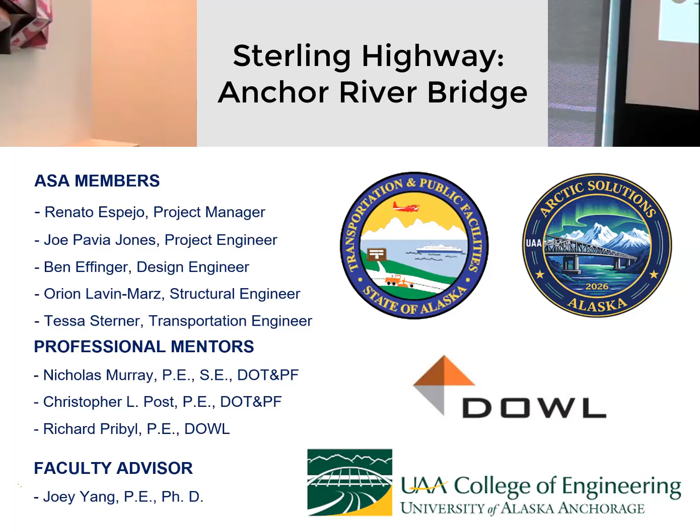Today, we'll talk about our project background, our design criteria, also we'll walk you through our decision matrix, how we completed all those projects, and our alternative analysis between roadways and bridge, and also our cost estimate, and we'll end with our lessons learned. We'll begin with our project location with Joe.

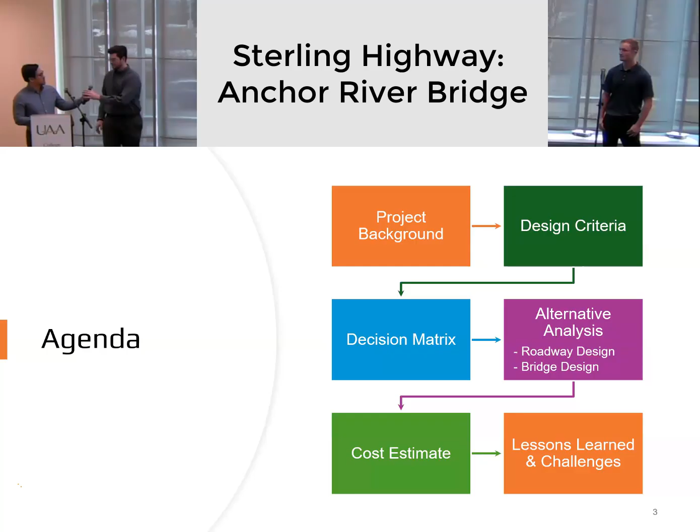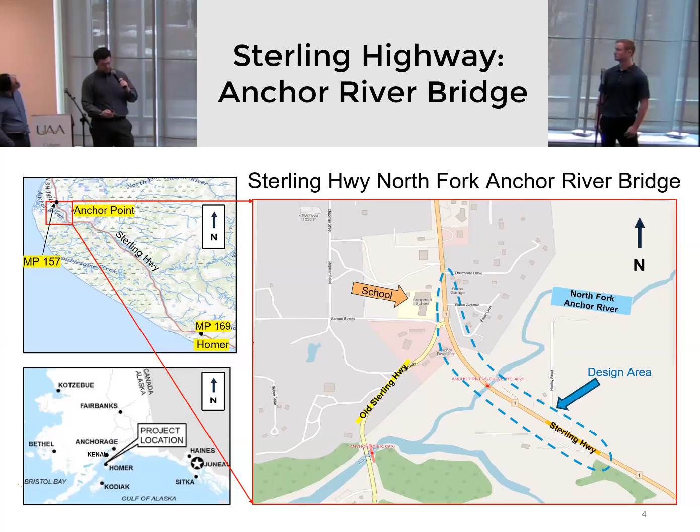Okay. So located in Anchor Point, just north of Homer, Alaska, near the intersection of the Sterling Highway and the Old Sterling Highway, we'll be focusing mostly on the area where the Sterling Highway crosses the North Fork Anchor River, where there's a bunch of old culverts. So in the 1960s, they put these culverts in thinking it'll work really well. They buried them under 50 feet of dirt, and it was super simple, worked really well.

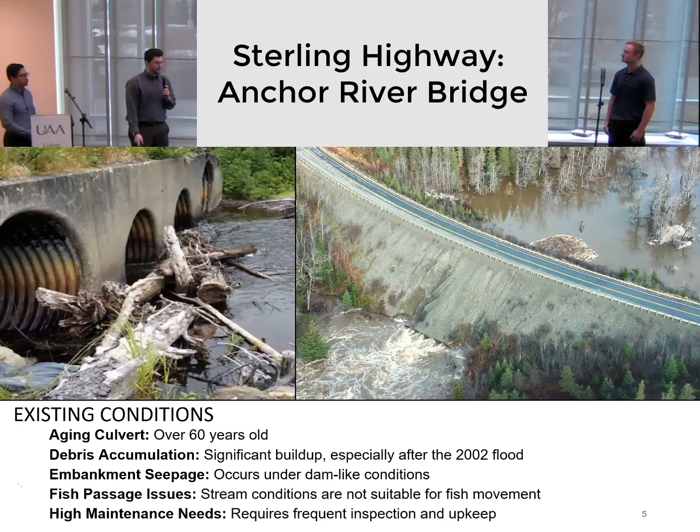Issues are that it requires regular maintenance to clean up all the debris, because otherwise this gets backed up, which you can see over here. And if they don't always do that, there are instances like in 2002, where we had a really extreme case with major rainfall and it all got clogged up, and it caused the road to act more like a dam, which is not what it was designed for, and it nearly washed out the road. Which is what we don't want.

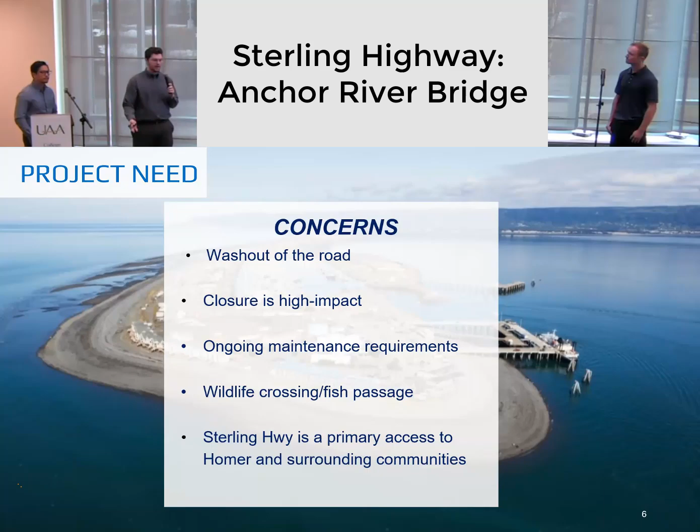Because this road is the main access between Anchorage and Homer, and it's also the main access to the local community, if this road were ever to wash out or close, it'll have a huge impact on the local area, and we don't want that.

So right now, the current speed limit of this section on the Sterling Highway goes from 55 miles per hour transitioning to 45 at the crossing. With our study, the 85th percentile speed ranges between 52 to 57 miles per hour, so we are designing our speed to 55 miles per hour.

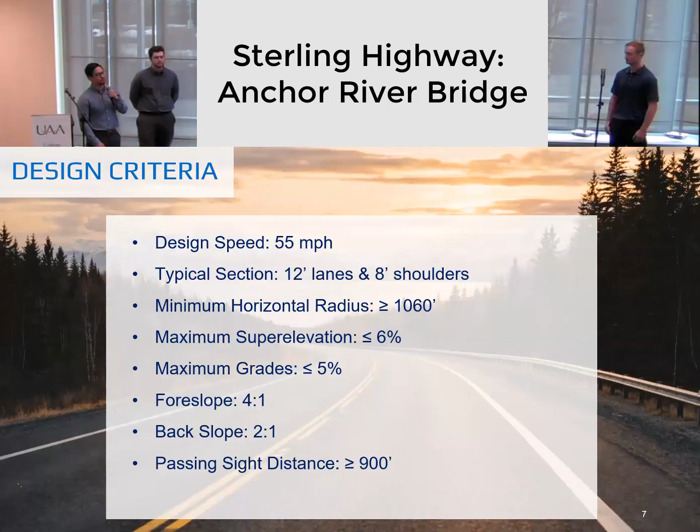Before that, we'll talk about our decision matrix. This is what we need to successfully grade our decision. So first, we talk about safety. We need to make sure we fix those problems in the design of the road, and minimize traffic congestion and worker exposure while we're conducting construction. Also, we want to make sure it's friendly for pedestrians and all users.

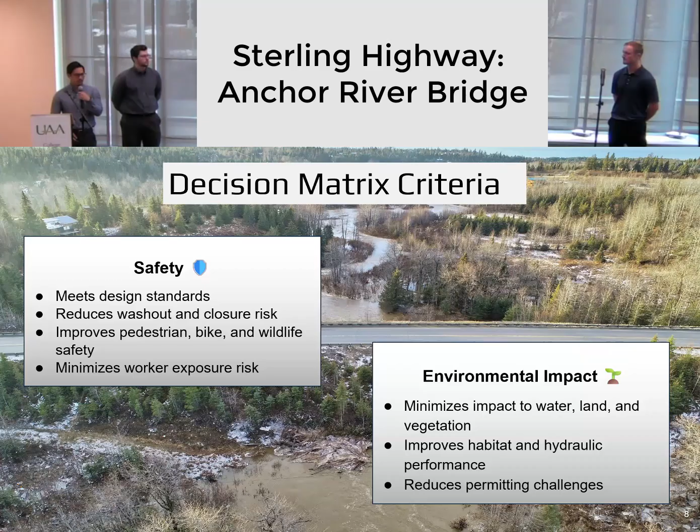For environmental, we want to minimize our land pollution, also improve the habitat of the aquatic system and increase the hydraulic performance of the river, and all of this will eventually reduce the permitting challenge and execution. Cost-wise, we want to make sure that the acquisition for right-of-way and utility relocation is less, and that's one of the things we have to consider.

We want to reduce the impact on nearby infrastructure, like the intersection or school. And for constructability, we want to maintain the traffic, make sure all that traffic keeps flowing, and reduce the construction complexity. And maintenance-wise, we want to make sure what we build, we can maintain, and it can last long and not give us a problem in the long run.

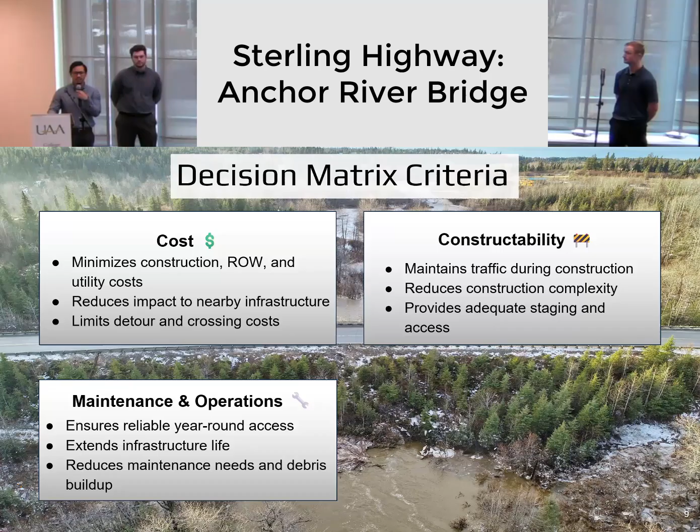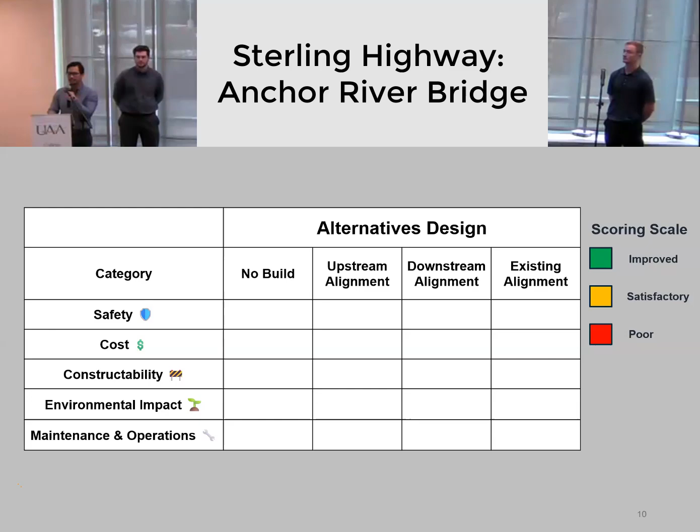With those categories, we will grade our alternatives: no-build, upstream alignment, downstream alignment, and existing alignment. We begin with our no-build. This right here, going from 55 miles per hour. An additional problem we have on this road, other than the culvert, is the curvature at this location. Right now, it's at 6.7%, which is 45 miles per hour on rolling terrain. It's not in the standard because it's supposed to be 6%. But since we're designing for 55 miles per hour, we will improve that to 5%.

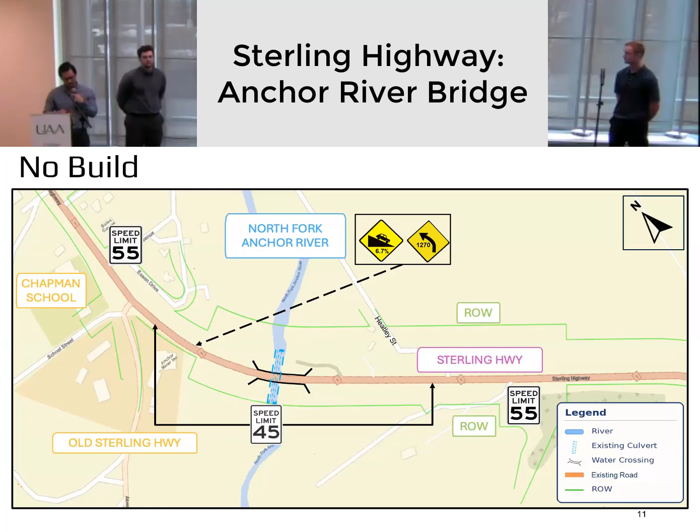On the existing alignment, we're just improving the roadway, widening the road from the existing 4-foot to 8-foot shoulders. At the same time, to keep the traffic flowing, we are installing a temporary bridge right here, which costs roughly $1.5 million.

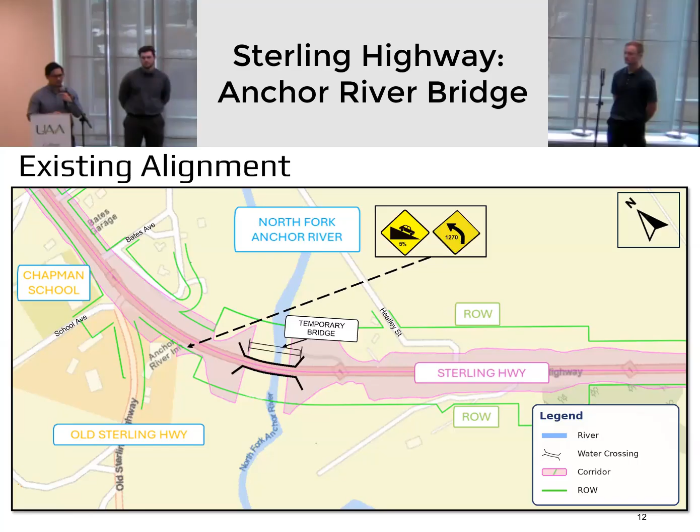And also, at the same time, this will cost us additional traffic control measures. Eventually it will add complexity to project execution and construction, roughly costing about a $24 million project.

For our upstream alignment, we are installing the bridge up north of the river, right here. On this right-of-way with our clear zone, we are acquiring some of the right-of-way, but nothing too big that we can't renegotiate with the current residential location. This is not impacting the current roadway, and we can keep the road open because we're building the bridge on the upstream. Altogether, this project will cost around $19 million.

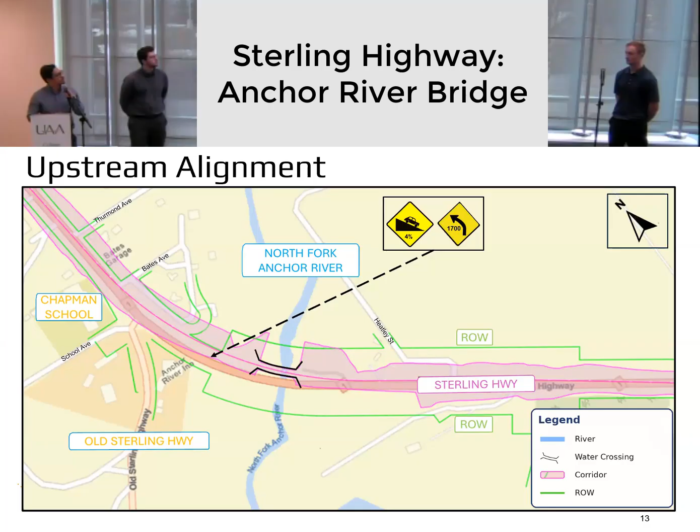And at the downstream alignment, just putting the bridge down on the downstream side will keep the road open, and at the same time the curvature and all the designs still meet all the standards that we're looking for. With this, it has a major acquisition of right-of-way and also major infrastructure reconstruction that we need to consider, which is the intersection.

Additionally, Chapman School is nearby. Our clear zone is pushing into their parking lot. We don't want to compromise the integrity of their foundation. So at the same time, we are designing a retaining wall in that section so that it can help out.

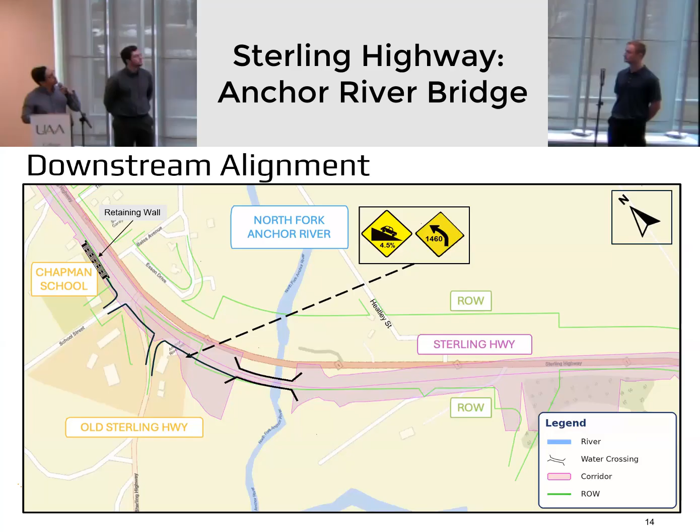This is the different vertical alignment of all the segments. As we can see on this side right here, this is what we're doing, our cut and fills. The downstream alignment is going to require some more cutting. This lane right here is where our planned abutment and retaining wall will go so we can build our bridge. This right here is the upstream alignment. Right now, it's about 200 foot and about 35 foot high. Same thing for the downstream, about a 200-foot bridge span and about 40 foot high.

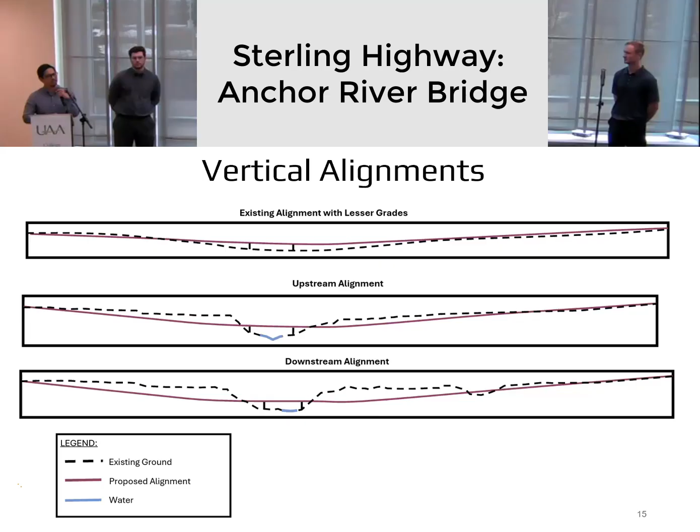And then the existing alignment: this current dashed line is the current ground, the current road, and there is a culvert underneath here. So to bring that to the standard of 5%, it has to go up a little bit higher, giving us a higher and longer bridge of 250 foot and about 60 foot high.

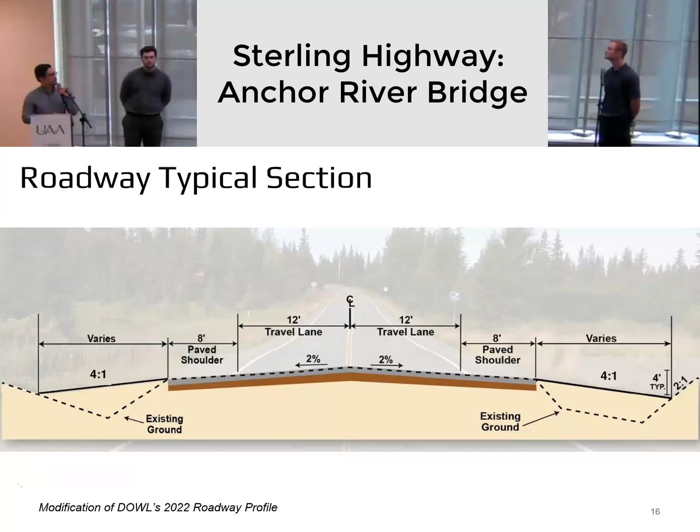This is the improved typical roadway for the rest of the corridor. We are improving the shoulder pavement from 4 feet to 8 feet. And now I'll hand it over to Orion so we can discuss the bridge.

Well, this river crossing area traverses a pretty wide and pretty steep span across the valley. As you can see from the vertical alignment, we're looking at around 60 feet high and 200 feet across. The first bridge we looked at was a steel girder bridge. We were able to design this with 5 steel girders. These are pretty heavy. You'll notice there are no piers in this bridge, even though it is 200 feet wide. We have about 1,000 pounds per linear foot steel girders, so they're pretty beefy to minimize deflections.

This bridge ended up being the lightest bridge we looked at, but also by far the most expensive. And there are also maintenance costs associated with a steel bridge. But the picture you see on the left is another bridge on the Anchor River that's steel, so it can certainly be done. You'll see we've got 40 feet of drivable surface, just like the rest of the corridor. In the future, there could be 3 lanes on these bridges. And you'll also see we've got riprap lining the bank, and there's a short retaining wall with a flat surface, which allows wildlife and people to cross under the bridge.

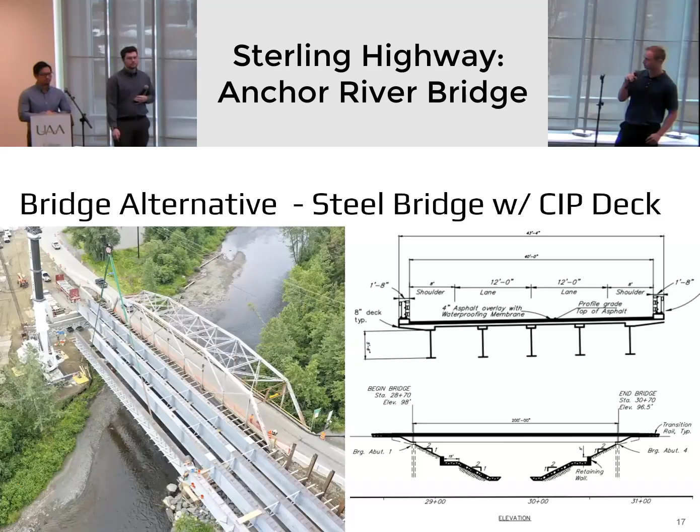The next bridge we looked at was a 2-span concrete deck bulb T-girder bridge. These are really common throughout South Central Alaska. These are 100-foot spans, and you'll see that pier right in the middle of the river. We have six girders for this one, and the same width and overall span. This amounted to about $10 million for the bridge alone, compared to closer to $16 million for the steel bridge. Certainly a winner in my book. And these girders are 5.5 feet deep, so it's a pretty big profile, pretty big project.

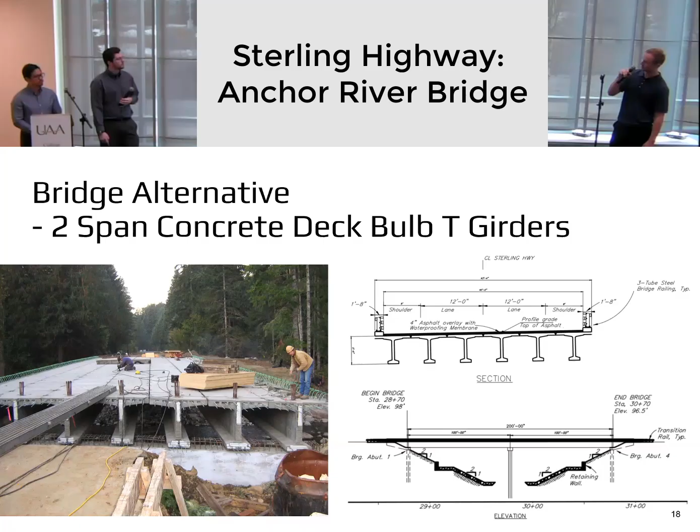We improved this by going to a 3-span bridge, which allowed us to use less deep girders. These are 3.5 feet deep, and we have the same number, so it's a lot less concrete and cheaper girders, and we did that by shortening the spans. These piles, you don't see in this picture, but they're going to need to go down a good 100 feet because the soils around here are really silty, with poor load bearing capacity. So we're expecting pile groups of 4 to 5 piles, a good 100 to 120 feet down. But this ended up being a lot cheaper than the steel or longer span, heavier girder bridges.

And there's a superelevation coming in and out of this bridge. So you'll see we've got the cross slope continuing. So there's a slight curve on this bridge in both the horizontal and vertical alignments.

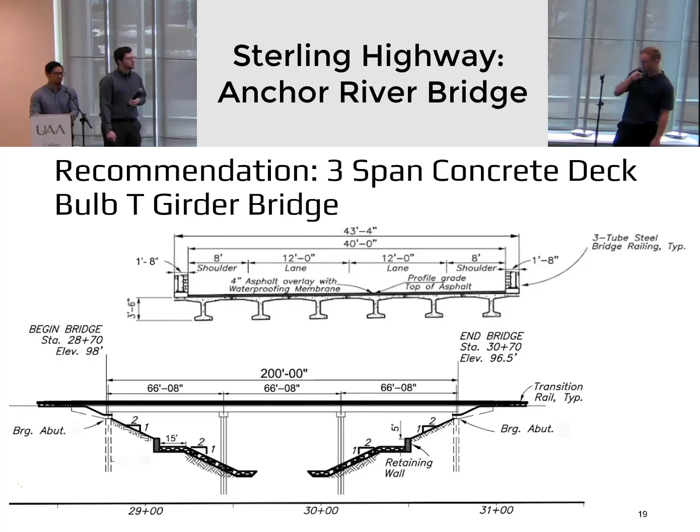Okay, so looking at the different alignments and comparing them, you can see there's a good impact or improvement when it comes to environmental impact and maintenance for different options. The downstream and the existing alignments will require additional costs, mainly due to additional acquisitions for right-of-way. Again, the existing alignment also had that temporary bridge, which has a big additional cost and also has an impact on the construction.

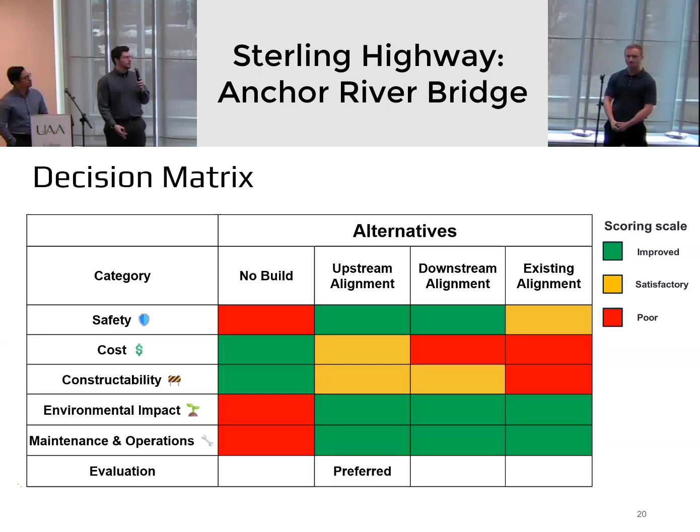So weighing those different factors, scoring wise, our preferred alternative came up with the upstream alignment. With the upstream alignment having smaller impact with right-of-way acquisition, mostly being some residential area up top, it's easier to procure and easier to get approved. So it's more likely to be approved than the other ones.

With the bridge not being on the same alignment, being pushed upstream slightly, you can keep the main road open throughout the project, which is very important to keep that traffic flowing so we're not impacting that traffic. And also pairing it with our 3-span deck bulb T goes well with the cost, and also having the pillars just outside the water. It doesn't impact the waterway, which has quite a bit of fish in it, different species of fish. So we didn't want to impact that, and it worked well with the wildlife.

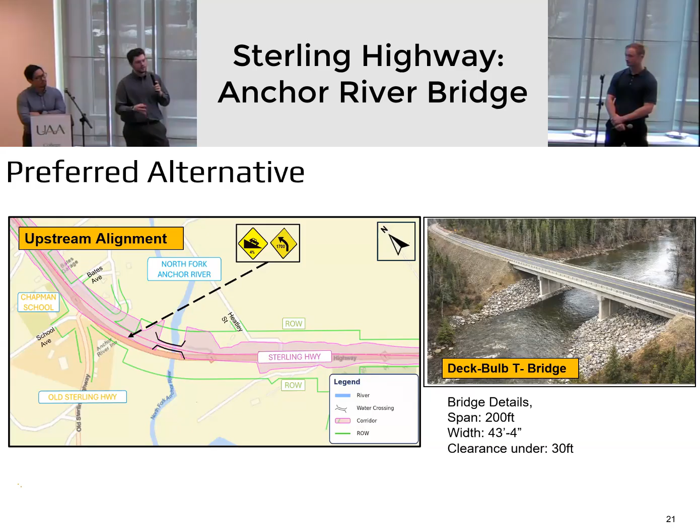Also, we're trying to keep the bridge short, because as you'll see, even though it was brought all the way down to 200 foot, it still is the most expensive part of this project because bridges are expensive. These costs were based on cost estimation using Alaska DOT's pre-construction manual and bridge manuals, so they're based on the actual costs of estimating in Alaska. There is some right-of-way acquisition, some underground utilities that have to be relocated, and then the road and bridge, coming out to an estimate of about 19 million for this project.

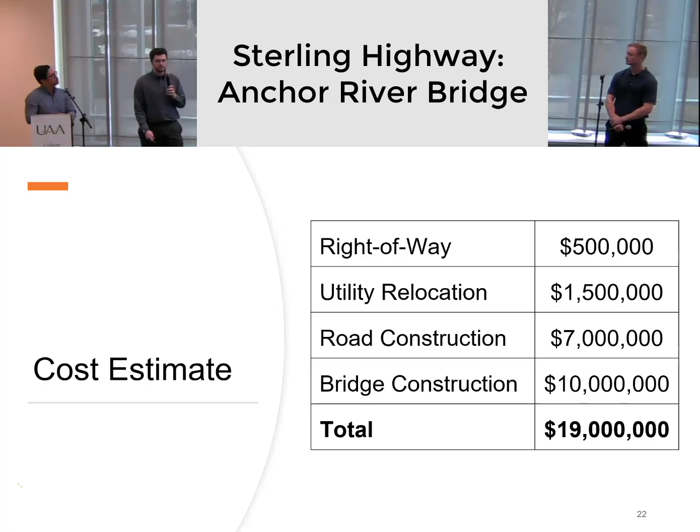And I'll turn it over to my teammates for some lessons learned. For lessons learned, we found it was pretty important to be on the same page for scope with your client. I think this is true if you're a civil engineering firm or a Capstone group. It's important to make sure the scope is feasible to complete and also satisfies your client. To start, this was going to be a full 12-mile corridor and 35% plans, and probably was a lot to bite off for us. So we probably should have gone earlier to make sure we were on the same page.

We also encountered kind of a domino effect of design. We were pretty intent on shortening this bridge to 200 feet, and one way we did that was by lowering the grade, and it ended up having some pretty big cuts that impacted the right-of-way in unforeseen ways. So it's important to not have tunnel vision when you're doing design and stay flexible.

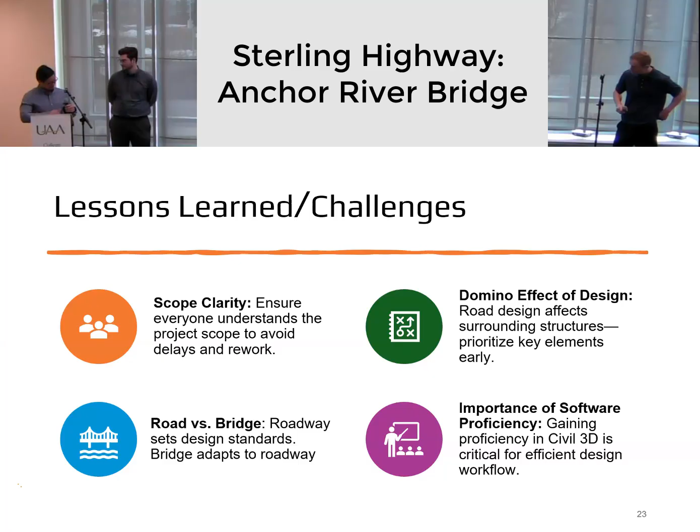And finally, with software, we definitely had challenges with Civil 3D. The school computers haven't run Civil 3D this semester, and although we can get it on our personal computers, a lot of laptops are slow or can't get Civil 3D at all. So we ended up doing a lot of the CAD work from people's internship offices, which is obviously not ideal, but definitely a learning curve there with the CAD work. That concludes our presentation. Are there any questions?

So given that this is a less than 30% alternative right now, we did all our design for alternatives analysis so far. The environmental concept, permitting, and all of those will be discussed at the end when we push further into design. So the question is, just to reiterate, if there's any coordination with Fish and Game. Thank you. We'll put that into consideration.